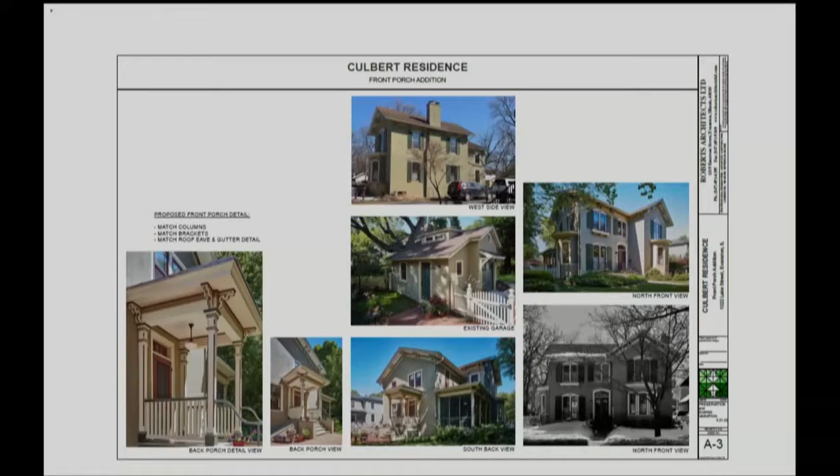So this is the back porch that was done several years ago, and that back porch followed the character of the screen porch that you see here, which was before it. Same columns, same brackets, and those brackets are the same exactly as are on the house as it originally was. Those brackets are all still up there and in beautiful shape. The house has been maintained well over the years.

Originally, it was not stucco. At one point, while working on this, we could see that there was horizontal siding, lap siding underneath all that. But we're not going back to that. The house has been stucco for a long time.

So figuring out a front porch to go there is a challenge for sure. And knowing what we know about the original one, it went from that corner over to the east side of the house here to that corner and filled in that space. Right now, there's that concrete stairway there, and I presume everybody had done their walk over there to see it.

Again, what we were trying to do was use the materials and the same vocabulary that's already established. These two bay windows have a lovely little roof with a metal roof on it. When the back porch was added, the same metal roof and detail was included there, so we followed that through on the front porch, what's in front of you today.

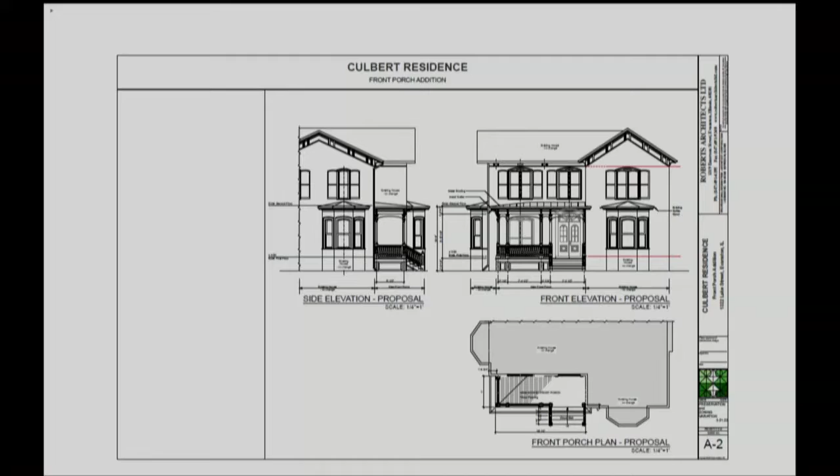Following the character given with these two bay windows on the north and east side, we present a roof of similar slope. Can't be exactly the same, given the dimensions, but it would be the same material: lead-coated copper with a standing seam, an inlaid gutter in this case, and then we'll attach it to an existing downspout that comes from the second floor. Our hope is to quietly tie that into the existing structure without adding more downspouts.

It'll just have this little connection there. The porch itself has wood stairs coming up to the front, much in the same position as it was originally, supported by piers below, which we're proposing as stucco to match the rest of the house—same color, same material, we'll follow through with that.

In closing the bottom, we'll have a wood lattice. The color is yet to be determined, but it'll be complementary with the rest of the house, the way John and Kitty have it set right now. We're not introducing any new colors to this.

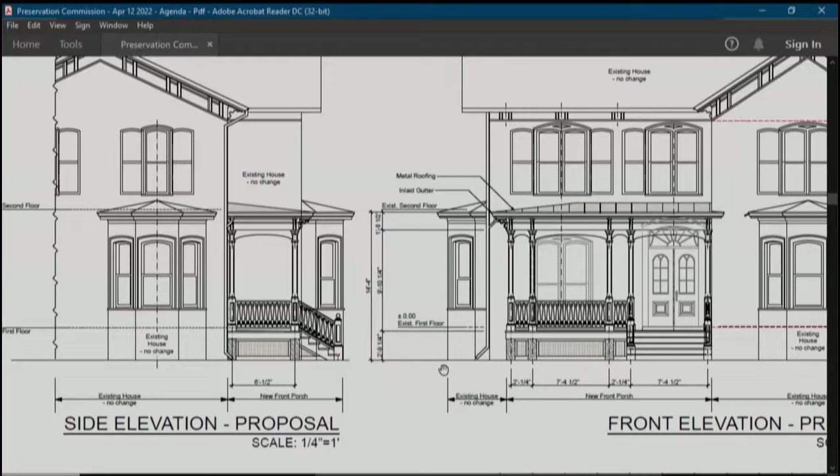The difference between these columns and the columns you saw on the back elevation porch and the screen porch is the following: it's the base here. We're setting these columns on a pier that will be made out of wood like the columns, and if we go a little closer, hopefully we can pick up some detail on that.

The column has a slight recess there from the body of the column. There's a base, there's a cap that recesses in, and there's a little molding that goes around the inside of that. This allows us to have the railing with more expressive balusters than the back. The back porch we just put square balusters on—it's a back porch, we kept that simple.

During the planning of the back porch, we were already talking about the front porch, so some of this was already in play in our minds and in John and Kitty's mind, and they included me on that. We thought maybe we'll save this kind of detail for the front, where typically the front porch would be more ornate. This is an Italianate design based on what the Evanston History Center says about it, and we don't argue with that.

Those tops are the same, and the beam comes across the same as in the back. Then we've introduced a bit of an arch, elliptical—this one's slightly elliptical, this one is elliptical, and they'll span across there. The spacing between this column and this column is the same as between this column and this column.

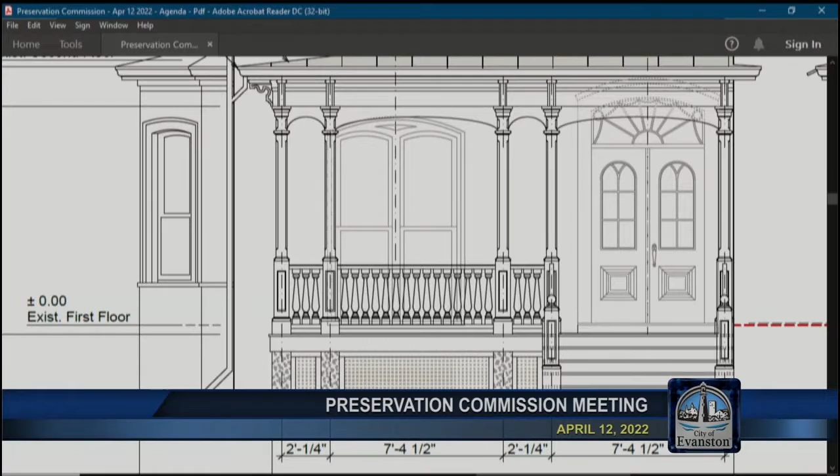So what Mr. Culbert said was that as you stand on the front sidewalk in front of the house, if you're walking down the sidewalk and you look up, the sight line is such that you will look under this elliptical trim here, and you will see the full door and that full arched casing that comes across the top with a little bit of a crown that runs across there.

I assume the second floor planter box is going to be a casualty. But that's probably the only casualty of the project, right? Are there any other questions by commissioners?

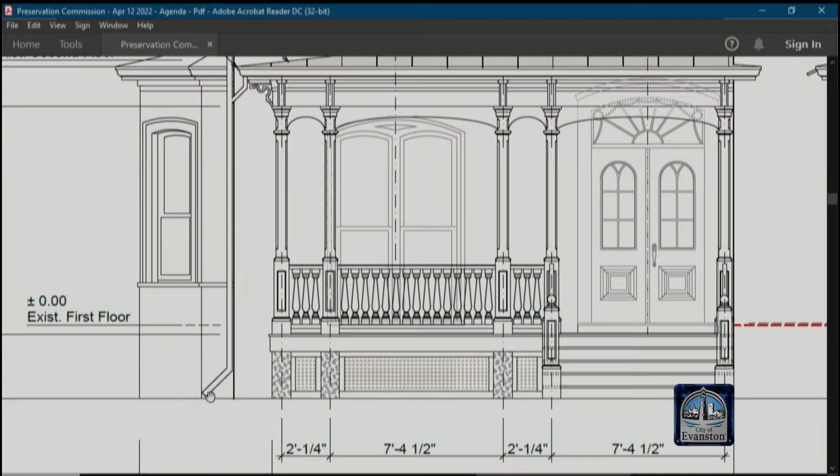Just one question, please. Can you remind me about the materials that you'll be using for the columns and the railing? Certainly. Predominantly, the columns, the balusters, and the railings will be cypress, so they'll be wood. And that's a good durable material that will hold up.

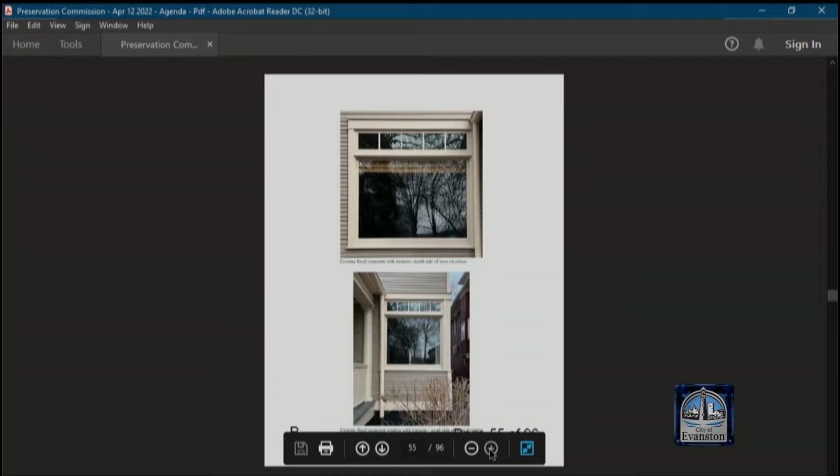When we enclose the porch, we put a window in there for a little pantry wet bar area, and then the window facing... that's the new porch window. You can see there's the rear porch—it's empty, of course, because there's nothing there.

Paul, there's a pointer there you can use if you want. Oh yeah, sure, why not. So I turn my... here's the... top something... star there... just this thing? Aha, look at that—there's the rear porch there. It's open underneath at the moment.

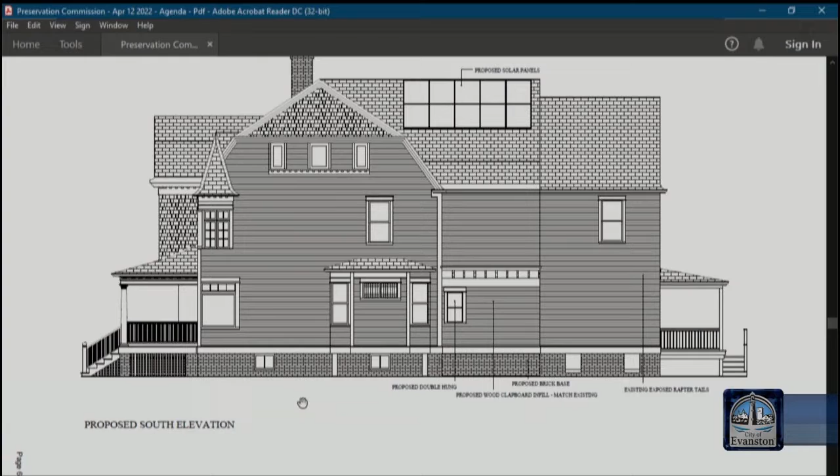We don't have a solar panel firm yet—they just took possession of the house, so it's something they want to propose to see if it resonates with you. If it does, they'd take the next step of having a firm come in and do a study.

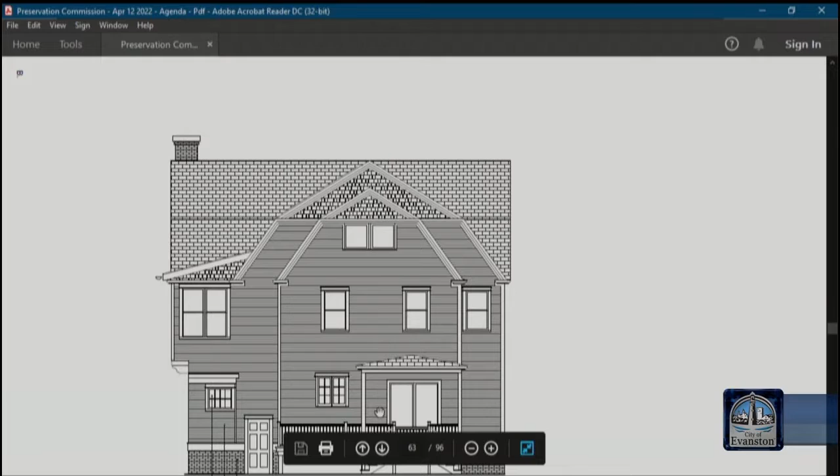Here's the old open porch. It has some lattice underneath it, but I don't think it's original, though I could be wrong. There's an existing rear door here, and that would become the new mudroom door. The proposed design shows this enclosed with the same size clapboard as the original house, and again the brick base. Of course we're leaving all this trim intact, with the rafter tails and all that.

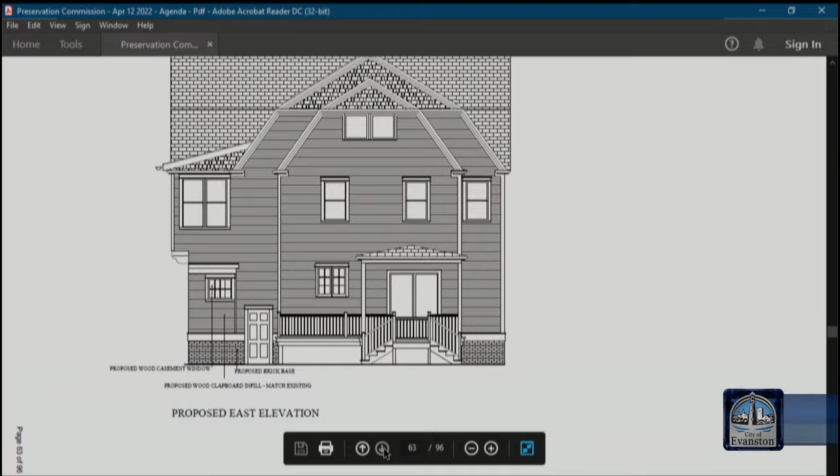What else can I tell you about that? This rear porch and this whole thing is some ersatz addition someone put on in the 90s or something. This elevation faces north, and in this space there's a little breakfast area, but it's totally shut off from light.

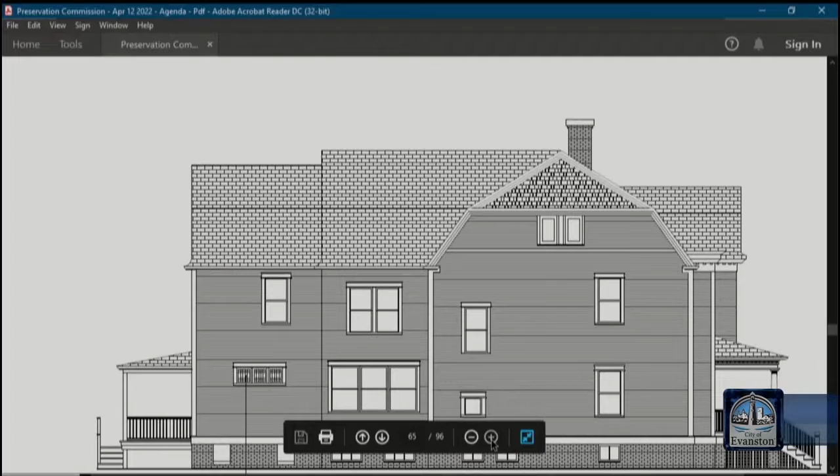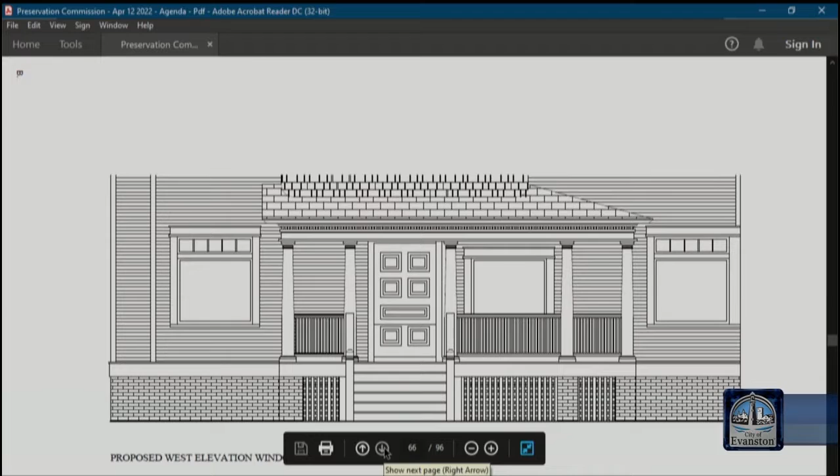We're proposing 3 fixed casements here, in the same vernacular as the ones facing south, which have a really beautiful leaded glass pattern. Here's the window again—we're using the same casing around these as the picture windows, and the heads and sills align, but of course this transom can't be replicated here.

Here's the ones we're mimicking on the north elevation. I'd like to align these things, but it just wasn't possible—it's sort of a forgotten elevation anyway in my mind. This is a little double hung wood window that goes into the little pantry bar area.

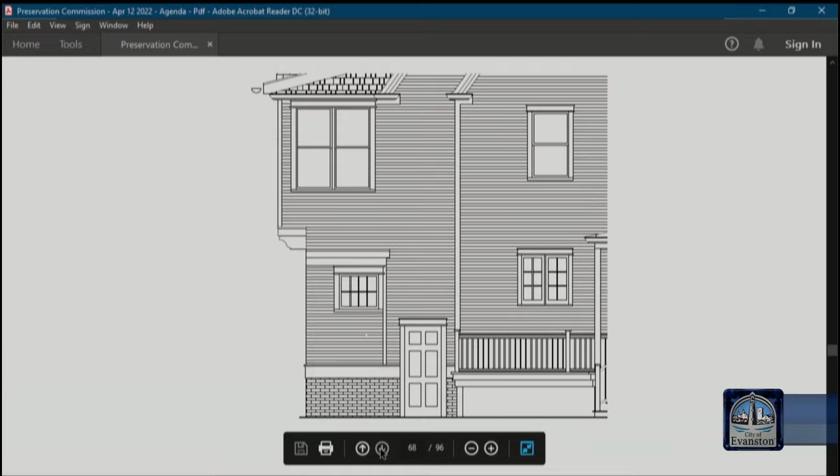This whole mudroom is actually very tall because it can be, plus you have this landing and a stair going up. So the idea was to do a whole bunch of cabinetry below that window line, and on the other elevations of the room, take the cabinetry all the way up to the ceiling. That's the reason why the window is at this height, plus it felt comfortable being engaged with this cornice.

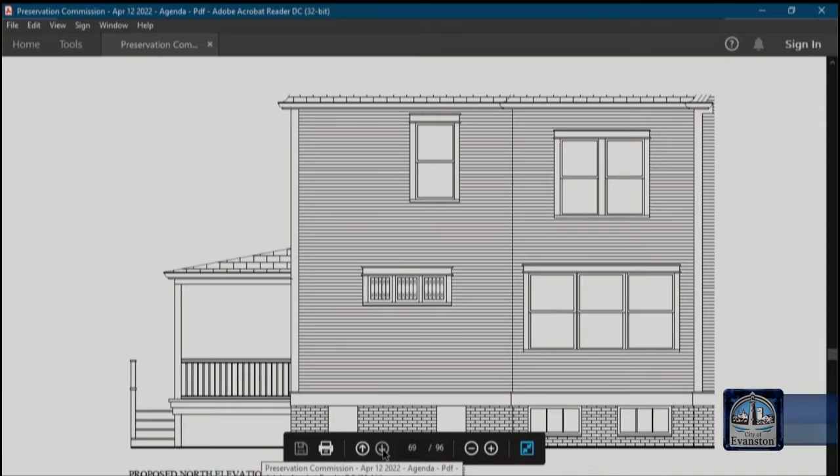And here again we're matching the head height here, and then these are almost pretty much identical size leaded glass fixed casements to the ones on the south.

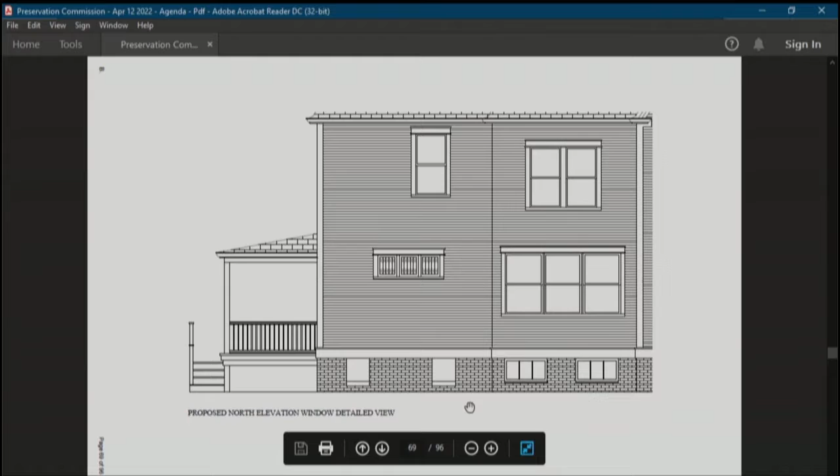I think that might be it. Thank you, Paul. Are there any questions from commissioners?

Hi, Paul. So the new openings—there's the new triple window at the breakfast room. That leaded pattern will match the window on the bay you showed us. Exactly. Okay, and then the new double hung at the mudroom.

The new double hungs in the mudroom are... oh, there, sorry, that one—that's the one you're talking about, yes. And then there's a new six-panel door going into the mudroom.

Are those the... No, that's actually original—I mean, it's not original. It's sort of a not wonderful looking aluminum door, I think, but it's there. I'd love to change it, but I haven't been asked to change it.

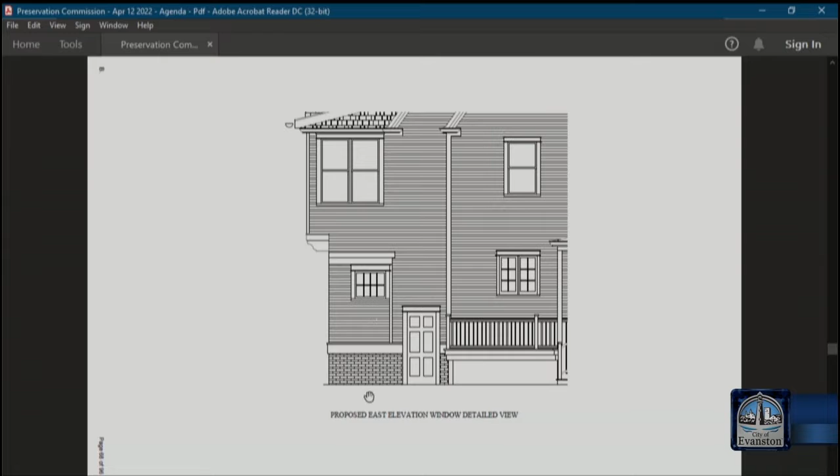Then those casements above pretty much have a very similar light proportion to the other casements. So the opening of the lights are almost identical.

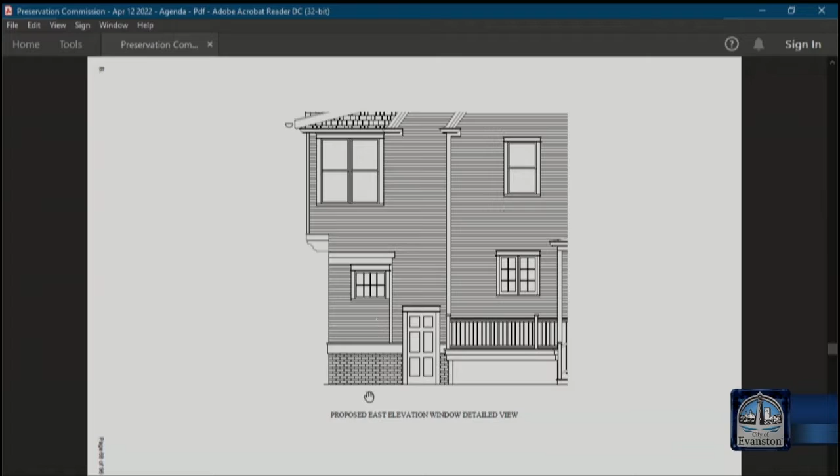Okay, and whose windows are going to be the new windows? We haven't chosen one yet. There'll be either probably a Kolbe or a Marvin. It's really all over the map right now because of lead times—Kolbe will promise us they can do it in 20 weeks, then we go with Kolbe, and they come back and say no, it's 36 weeks, then Marvin comes back, oh we can do it in 24 weeks. It's like, ah. So we haven't done any construction drawings.

I'm here tonight sort of just to see conceptually, is this something that will resonate with you guys? And if it does, then we'll come back with working drawings, obviously, and show all those details. If you'd like, I will provide you guys details soon before we finish the set, if you'd like to review the windows—that might be one way around it. I just don't know right now what we're going to use.

There will be an all-wood window, like I've said. All wood, not clad. Oh God, never, no clad. All be wood—I'm pretty sure they'll all be simulated divided light with spacer bars.

The casements—what we like to do is order a fixed casement, and then have our leaded glass person make the leaded glass panel, and the carpenter will make a very, very small frame for it. Depending on whether we want the leaded glass on the exterior or interior, we'll place it inside the jamb, connect it, caulk it, paint it so it's kind of seamless, and the glass size is exactly the same. So when you look at it, it looks like an original leaded glass window, but you still get the energy efficiency out of it. That's the way we've been doing it, and that's what we'll probably do here too.

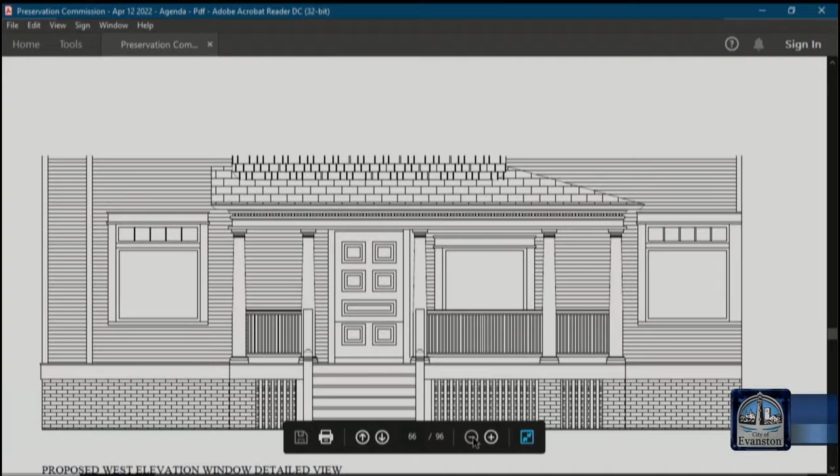Second question was about the solar panels. Is the client thinking of just maintaining them on that one roof surface? Or it looks like there's even one further back from the front of the house. Were they also thinking of putting additional ones, or is that really all that we're being asked to consider now? I think that's the only south-facing spot that you could really put them.

There's one - if you go to, keep going around, slide 61. Oh yeah, I see what you're saying, there's another roof behind that. So what are we being asked to consider now, that's a really good question. I showed them this as a really compact thing, we thought the 10 collectors would probably be pretty good as far as getting some payback. But that's a very good question - I suppose if they come back and want to put some more on the other south roof, I guess I'll have to come back.

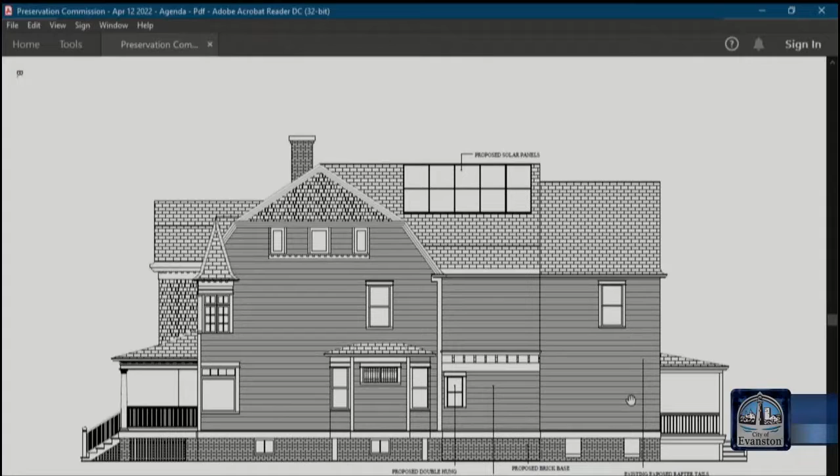Thank you. So one thing I wanted to put out there for my fellow commissioners is that for the solar guidelines, typically we see sections through a solar panel, and we often see the material cut sheet. Since this is on a secondary elevation, I wanted to get the commissioners' feeling of, can we do this with maybe some statements and then have it be an administrative review since it is towards the rear of the house? I don't know how people feel about that.

But first, if there are no other questions from commissioners, we can have Paul take a seat. Paul, why don't you take a seat and then we can discuss that. Could I ask about - so my recollection is the solar guidelines give discretion to the staff, even potentially to approve completely solar panels that are not visible from the street or kind of minimally visible, not on the primary facade. Go ahead, Kate.

Yeah, that's correct, Mark. We've done that in the past, particularly for non-landmark homes or homes that are non-contributing, but I think it would be appropriate in this instance. And I think if we made a statement that they were just going to be parallel with the roof plane and that they're low-profile panels, with the follow-up administrative review of the materials, the section, and the exact location, I feel like in general we would be comfortable with that.

And then I think the other item would be if Kate or Carlos feel that they need to see any of the window details once they pick a window manufacturer, just to see comparison between the existing and the new. But again, I think that can very easily be done administratively.

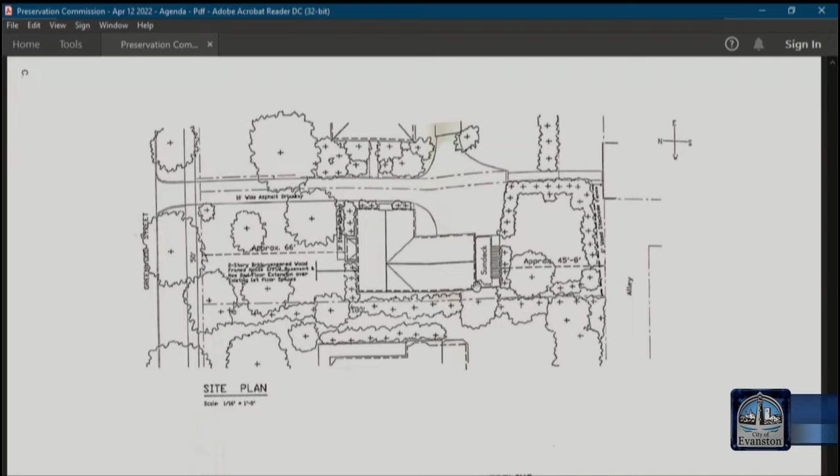Where would you like me to start on that then? I think if you want to go to the elevations, I think those are very telling. And then obviously you have your renderings that you added. Why don't you walk us through what you're changing as far as the elevations? Sure. Okay, so these are the existing elevations.

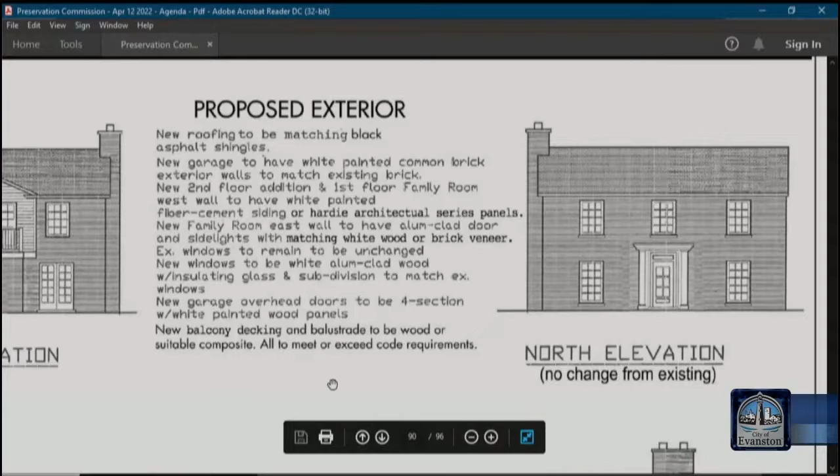And if we could scroll up, what would change is the south elevation. Well, first of all, the north elevation, which is the most visible elevation from the street, would be unchanged. The south elevation would have an added garage, so that would extend out further into the backyard. And then the side back elevation here of the addition would clearly change the view of the home from the south.

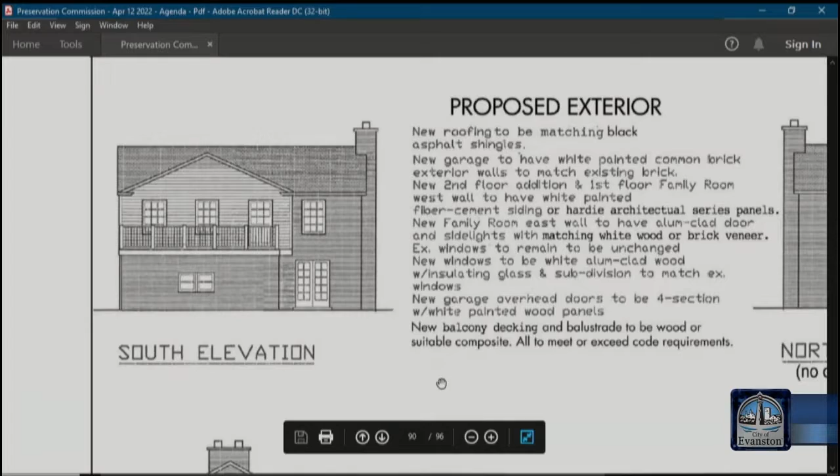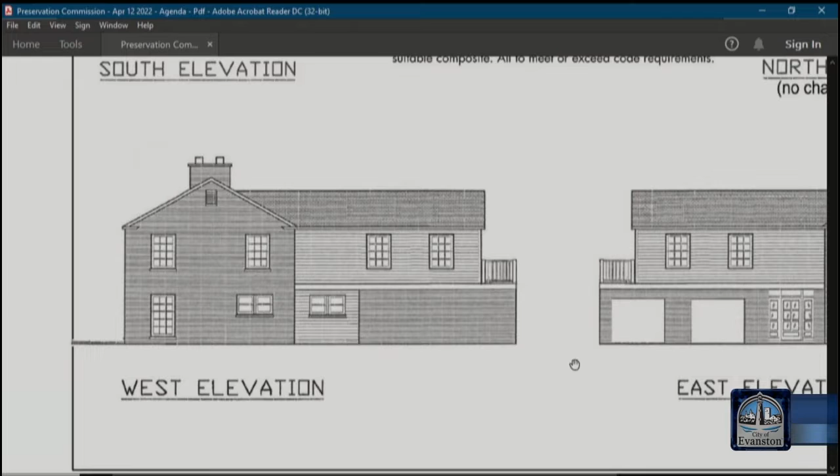The west and east elevations would obviously change as a result of this added bathroom and bedroom addition above the existing flat roof section. This is a family room back here, and then this here is a single-car garage with a proposed parallel garage right next to it. Also demonstrated here on the east elevation, the added garage next to the existing one, and then the sided bathroom and bedroom above with sort of a small balcony off of the bedroom.

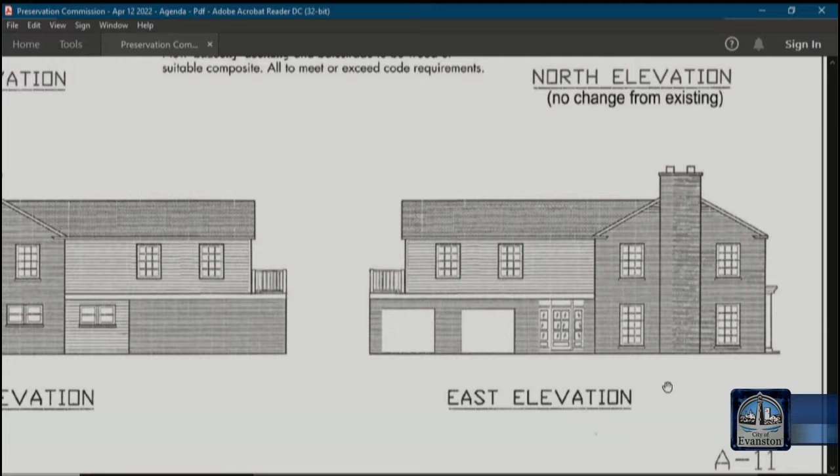Is that awning over the door? If you go back up, Cade, if we can just get an understanding of what goes on above that door and how does that align with the new addition? So actually, that wall is recessed currently about a foot, and hence the awning up above it. But that awning would be removed, and the new wall would be flush with the brick facing of the garage, so there wouldn't be an awning up above there, on the new second floor wall.

And then the ground floor wall would stay recessed. The ground floor wall would not stay recessed, it would come out and meet and be flush with the brick of the garage. So your addition would be a completely flush wall on all sides? Yes, with the exception of the deck that's on the second floor. Correct.

And if you could just walk us through a little bit of your ideas on materials. It's a brick home, and the existing garage has brick, so I would continue the brickwork for the face of the new garage. Also, right now this back entrance is basically just glass and aluminum, so we were considering brick for these two sides on either side of the door, or possibly painted wood. And then a Hardie board siding up here, or architectural panel, depending on availability or your input on the use of materials for the siding.

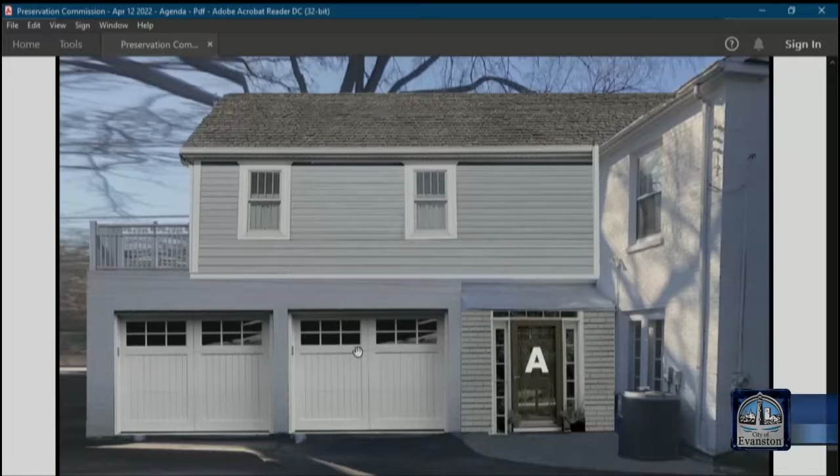Are there any questions by commissioners just on the proposal? And Cade, I believe, not contributing?

The status of the property is a little unique in that it's listed as a non-contributing property, but I think that has more to do with when the National Register District was nominated, which is in the late 1980s. They likely listed it as non-contributing because at the time it was under 50 years old. I suspect, and I would encourage the commissioners to review it as if it's a contributing structure. I'm sure that if the district were resurveyed, it would be contributing.

What does that mean exactly, non-contributing? If you survey a district, there are two types of properties: contributing or non-contributing. It just means that the structure as a resource either contributes to the architectural characteristics of the district as a whole, or it doesn't. So you might have a non-contributing property because it's been altered significantly and doesn't have the architectural integrity it had when first constructed. But it might also be listed as non-contributing just because it's considered contemporary or new, and that threshold in the National Register is 50 years of age.

We don't have any standard like that for local district designations, so I suspect in a resurvey this would certainly be a contributing property. It actually has pretty significant integrity for a building like this. That rear addition actually isn't an addition, that's original to the property, the attached garage. It has all its original windows that I can tell, and it's in good condition.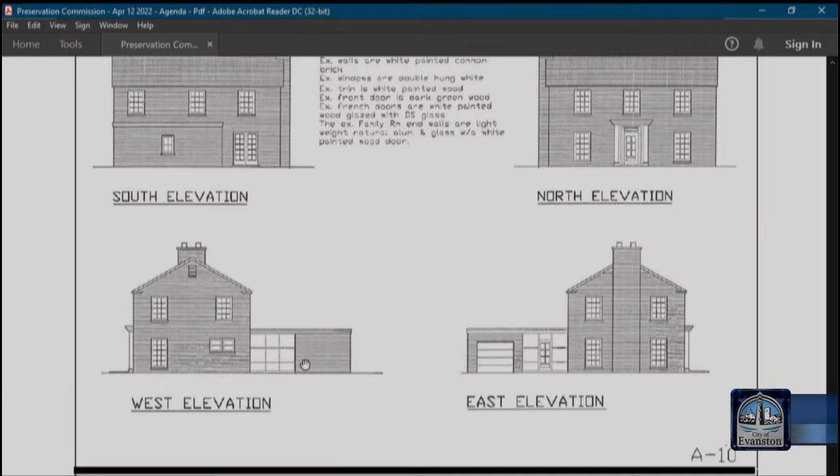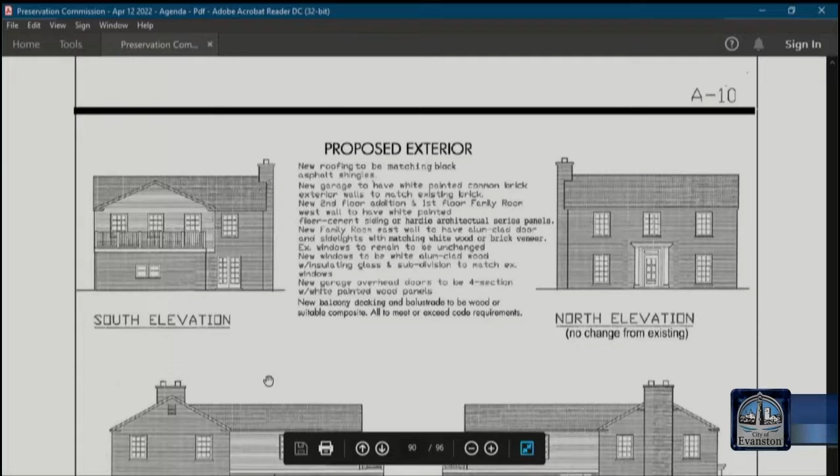Do you have an idea about the windows you wanted to put in the new addition, and what type? So all the existing windows are wood, double hung, 12 glass panels, and I would certainly like to keep that look for the addition. My photo rendering isn't really accurate, because I'd like to use a Marvin window that's essentially the same as the existing windows in appearance, though maybe a little smaller than the existing ones, which are quite large and come down to about 10 inches from the floor in all the rooms of the existing house.

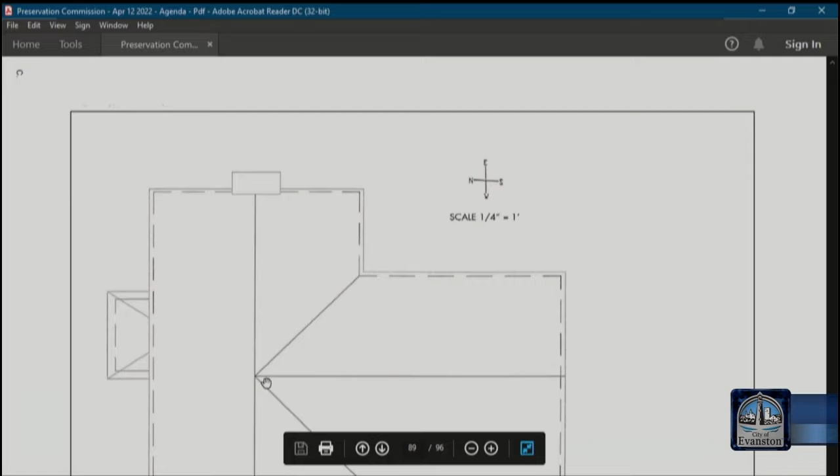I think the second story has double hung, 6/6 wood windows, and the first floor is 6/9, so they're a little bit taller on the first floor. Okay, that sounds right, thank you.

John, the master bedroom on the second floor - do you have the dimensions of that room, not including the closet or the little alcove next to it, just the main square? The interior details are still being worked out, but it covers about a 25-foot span from the exterior wall of the main house back to the end of the addition. So that's probably about an 18-foot square for the main body of the bedroom, roughly, yeah.

Mr. Stolzen, I think typically - and I know you've had some conversations with Cade and Carlos about it - we see the detailing of how you're going to do the trim and the connection from the addition into the existing building, things like what your railing will comprise, existing window sections next to new sections. It's my understanding you have an architect you're working with on that. So for my fellow commissioners, the idea is to give him some input on how we feel about the proposed addition, its massing, scale, and proposed materials, and we'd ask you to prepare those documents so we can make sure we know all the details.

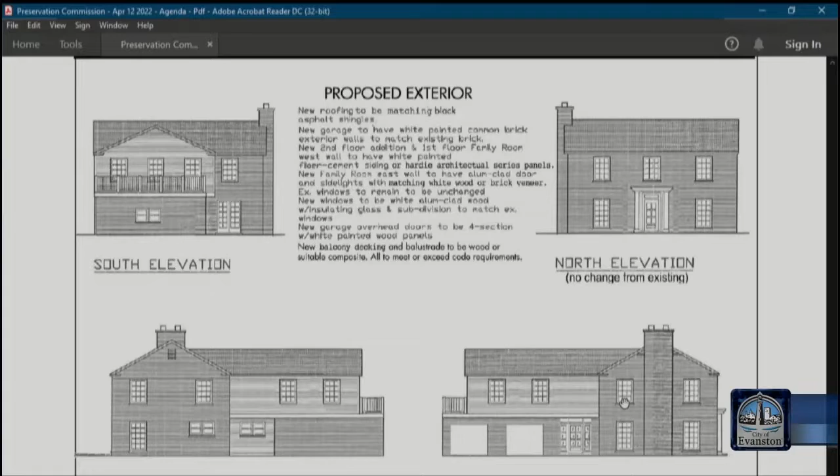My thinking was to improve the look of those walls, because it was my understanding that it was originally a breezeway when the home was built, and may not even have had much of a wall there - I'm not certain if that's correct. But I would want this wall to look as close to the original architecture of the home as possible, and the condition of the aluminum and glass isn't the greatest anymore. It's weathered a little, and there's certainly room for improvement on the appearance of that.

So if you were recommending it remain all aluminum and glass, and if that was the decision, I would replace it with new, because frankly it's old and weathered. Right, the material can change, I just think that foot...

Setback, I think, is just a nice detail to visually show that this is the addition and this is the existing house. Yeah, the recess - the materials can change if it's not in great condition, but also the recess of it. Does it recess on both elevations? The roof, I think from the roof plan, I saw that it kind of goes in, right?

I think we've considered on other cases that you replace with new materials similar in rhythm and size and spacing, but the comment is that you keep it in the same plane and not push it back out.

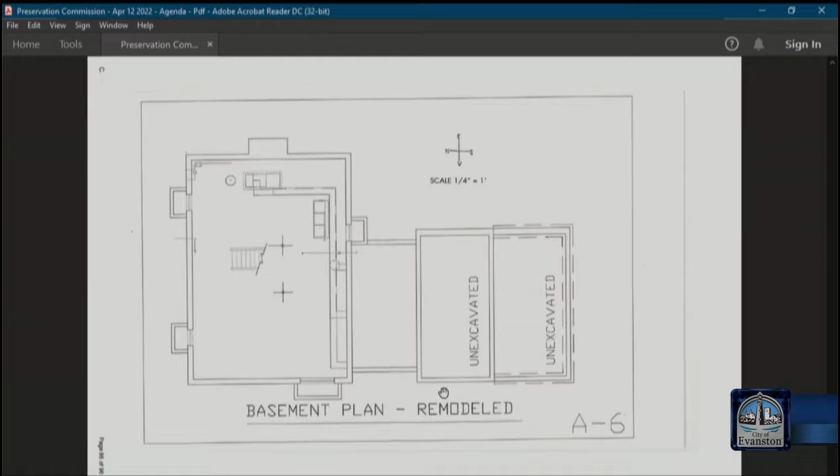Okay, if we could go back to the last one, if you wouldn't mind - right here. So right now, this wall that is currently recessed - if it remains recessed, it would interfere with the idea of this kitchen being enlarged, because then you'd have a bump out there.

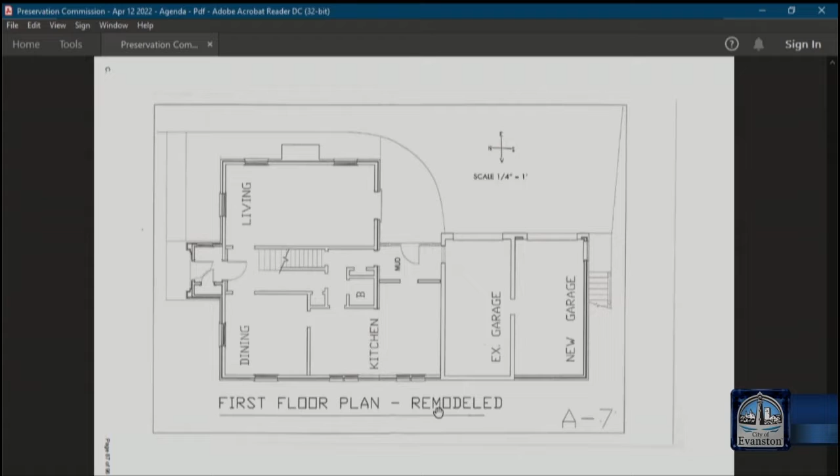Would the commissioners have an issue with keeping it on the entry as a suggestion and not on the other side? Perhaps that's an option? We don't want to design your proposals tonight, but we do want to give you feedback on how we see the historic aspect so that it helps you.

Was there actually a photo of the west side? Because I think that would be important to give you feedback on, but if there's no photo, it's hard to do that. Apparently one was not provided. I think you definitely want to explore that with your architect.

And then if you're going to come back with the details, that would be something you want to talk about. I just have another thought on alignment, and I might be misreading this, but I'm looking at the south elevation before and after in the second story, and it appears as though the second story is extending further to the east than the footprint of the first floor. I don't know if it looks that way.

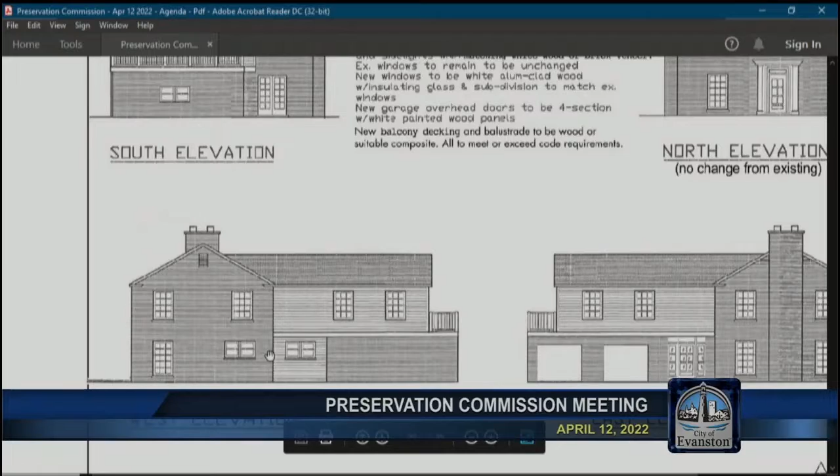Let's see, that south elevation, go up a little bit. This garage would remain on the same face as the existing one. Right, but would the second story align with that, or does it cantilever out there?

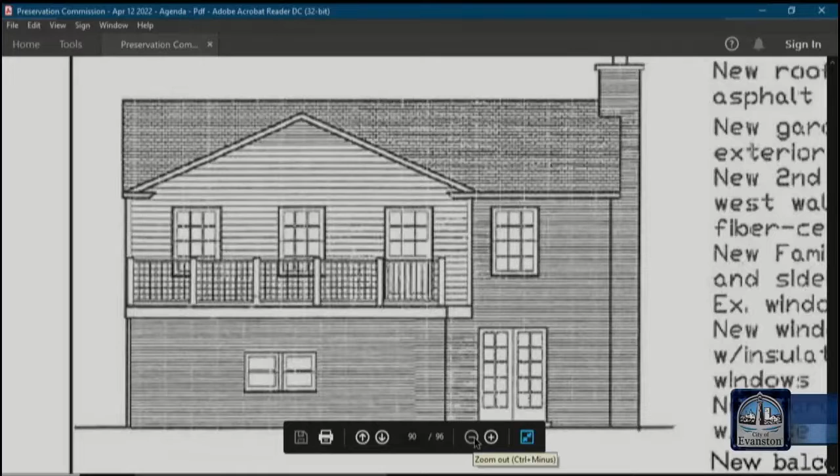I think it is going, it's supposed to align. I think that would be, I don't want to speak for the commission, but I think that would be our preference if it aligns. I think the cantilever poses an element. I would have that drawing corrected.

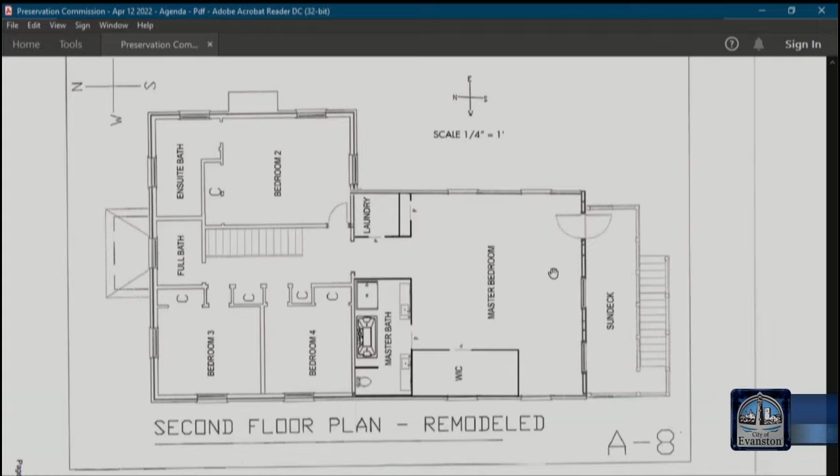Does anyone have any comments or feedback about the windows? Not necessarily the windows, but just to clarify a little bit, how visible is this south facade that we're talking about from the public way? Is it at all visible or partially visible? If it's not, all the comments you made, I think, will be recommendations rather than requirements, because we don't have purview over facades that are not visible from the public way.

Now, if there's an alley, and from the alley you can see it, then definitely the commission will have purview over those elevations. Yeah, absolutely, there's an alley there. But as far as I think, it's nearly all visible from the alley. So just to clarify, because it's important, all the comments that you are receiving from the commission, in my opinion, if it's visible.

So all the comments about the aluminum window, that they suggest to keep it even though it might be new, and also the preference of having the cantilever that it shows on the elevation not be there, so all those corrections need to be made. Absolutely. Okay.

Carlos, Kate, is the hope to continue this and bring it back? Yeah, I think I'd like to bring it back in front of the full commission. I think it lacks really the clarity that the commission probably needs to make a decision. But David, maybe if there's any questions you have or input that you'd like from the commissioners, that might be a good use of time.

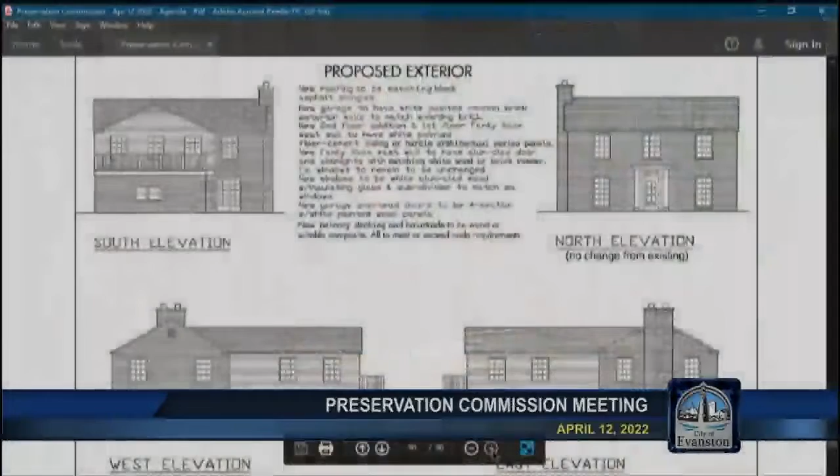So color isn't in our purview, okay? And since the house is brick, I don't want to speak for my fellow commissioners, but it's really going to be what is proposed, and if it looks compatible. In respect to colors, we cannot tell you what color, but the ordinance says that the color you choose should be compatible with the house. Yeah, it's a white painted brick house.

So for the siding, I would try to use a very similar color to the paint on the brick. I think the idea of keeping the metal panels, which Carl brought up, the aluminum one, and then having the rest of the ground floor be brick to match, would be more appropriate than introducing another material on the bottom. But as far as the second floor addition, I think that is something that has a little bit of flexibility.

I don't object to the change in material between the brick and the siding, but it's exacerbated by the massing and what's going on with the existing garage, the new garage, and the second story piece over the top of it. I'm really looking for the end of the bedroom to not land over the new garage door. I'm not going to design it for you, but there's a tension there that I think if it were all in brick, it would be less problematic. But if you're going to change material, it would be great to see a reason for the second story bedroom to end where it does, and not over that door. There's something about the proportion of the facades and the solids versus the voids that does not look compatible with that home or any colonial revival home.

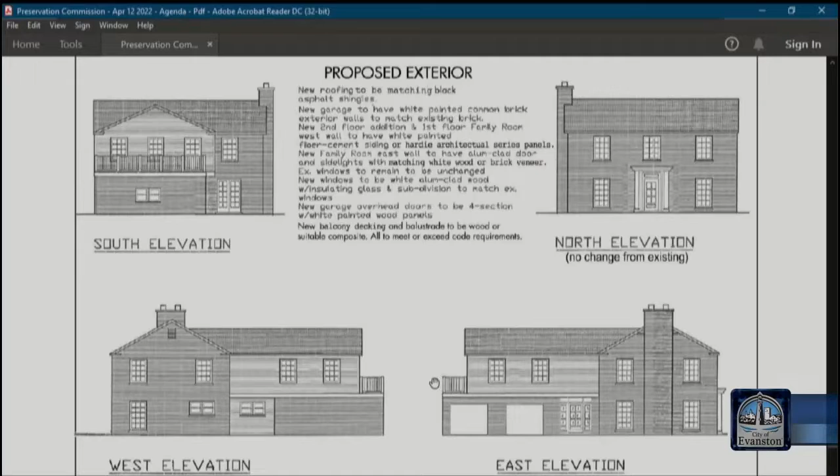Do you have any other questions you wanted to ask us? I don't think so. And I'm sure Kate and Carlos would be happy to follow up with you.